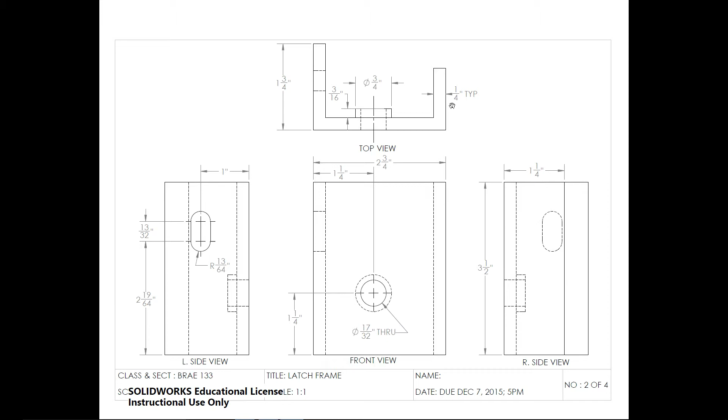Okay, I've given you all the dimensions in fractions since you guys seem to like those more, and I've also given you the complete orthographic views of the striker plate. So I don't know why this is over. This should be on top of that. I'll have to correct that. Anyways, so you have those at your disposal.

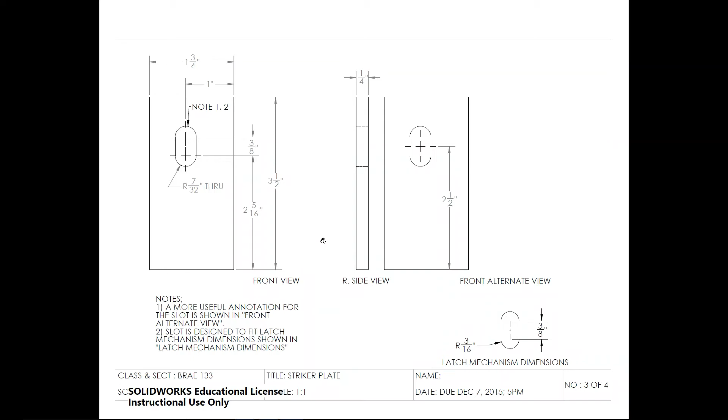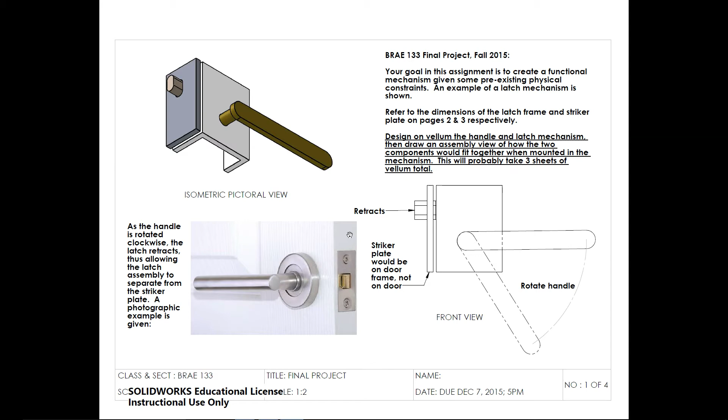You're going to use those parts, and then what I want you to do is to design this latch mechanism, not the one I have, but your own. So you're basically designing a door handle in its most simplistic form. So I've given you a list of what I expect from the project, and how I'm going to grade it over here on the last page.

I do want to make sure that when you guys are doing your orthographic projections that you align them properly. To be honest, I don't care if you draw a view and then you realize, oh, it's on the wrong side of the paper, and you can't fit the other view. Long story short, too bad. So make sure that you think about where you want to start drawing so you can fit the other views.

Okay, I'm not requiring any isometric on this. That's one of the things I cut out to hopefully make this easier for you. I also talk a little bit about slop and tolerances here. So basically, if you have a 1/4 inch bolt, you don't drill a 1/4 inch hole. It doesn't work. The bolt tolerances are not precise enough, and if you try and put that bolt in, it's going to be tight and it's not going to fit.

So if you want to drill a hole that fits a 1/4 inch bolt, you have to drill it slightly larger at 17/64. That's 1/64 above 1/4 of an inch. So that's the thought process I want you to have when designing this part, is that you need to have a little bit of a gap, a little air gap between your pieces in order for them to move smoothly.

Make sure that you do not dimension any hidden lines. For any arcs that you have, use center lines and center marks as needed. Remember, you can dimension center lines, but you cannot dimension a hidden line.

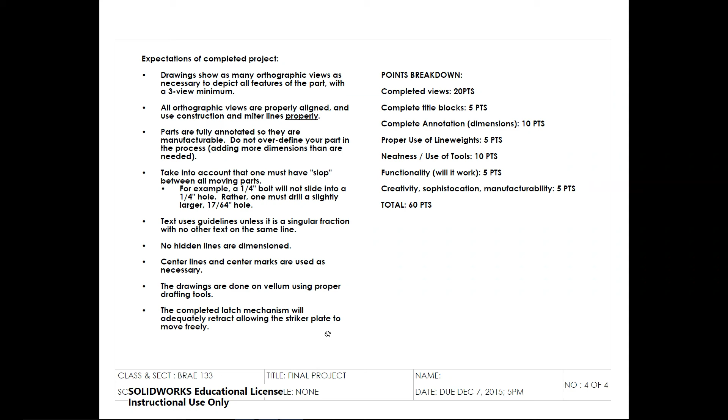After you get your 2 parts designed, you do want to have a third drawing that shows how they would fit together, and you could show that either with the frame pieces or without. I'm going to leave that up to you. It'll probably be easier with the frame pieces in there, but we'll talk about assembly drawings this next week. So that is the document you have there.

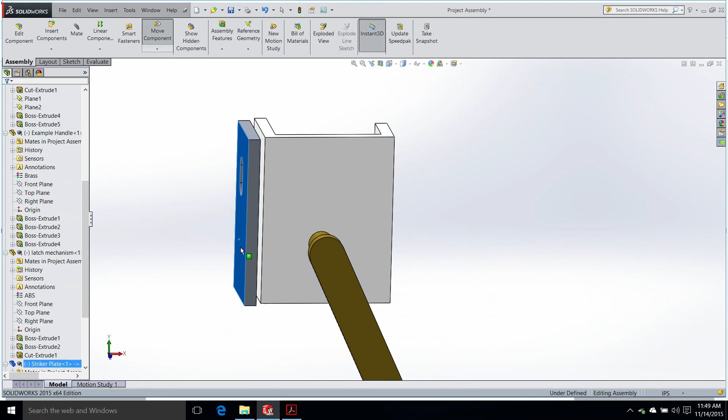I also have the SolidWorks model itself that I used to generate that, so you can see as I move the handle, that latch mechanism retracts, allowing this piece here to move freely. Okay, so that's how you would use it to open a door or something. So anyways, that's it. Hope that helped.